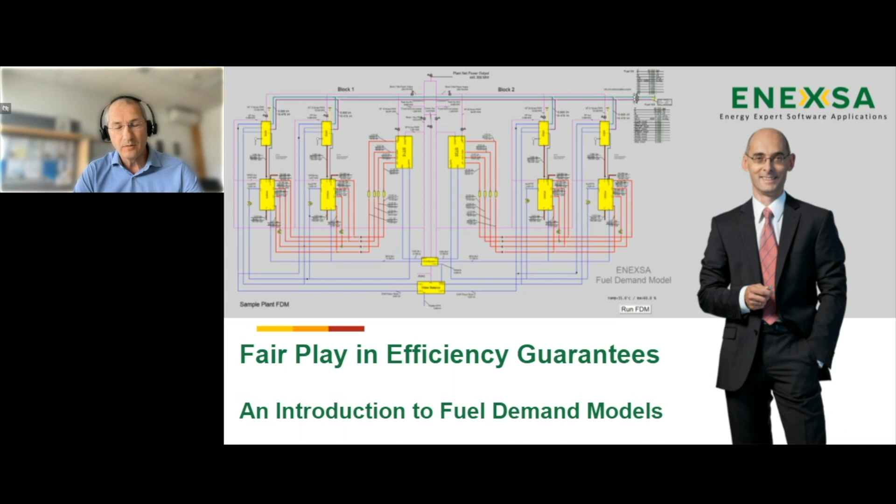My colleague Peter Hartner and myself want to give you an introduction to fuel demand models and settlement systems. First, I want to give you a brief introduction to our company, ENEXSA, and then go into our topic: introduction on why and how fuel demand models are applied. Then I want to hand over to my colleague Peter Hartner, giving you more technical detail on the thermodynamic modeling that we apply and on how a fuel demand model is running online. We want to conclude the webinar with a short summary of ENEXSA's experience, and most important of all, we want to answer questions that you may have.

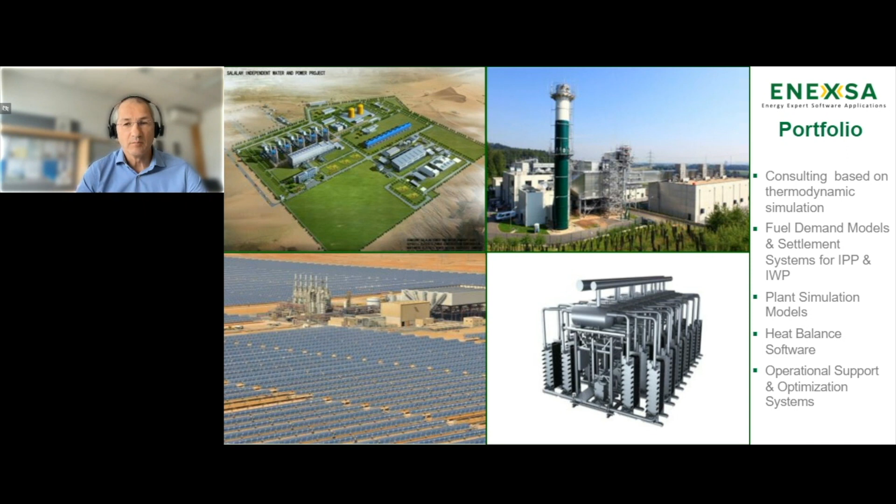But in most of our projects, the underlying part is a process simulation model, as shown on this slide. With the Ebsilon Professional Heat Balance software, we can model the power plant to the very detail. Peter will show more details later on in his part on the thermodynamic modeling.

Any type of power plant, may it be fossil-fired gas or steam plant, cogeneration plants, renewable plants like solar, or even the latest processes including wind, solar, PV, electrolyzers, fuel cells - all of that can be modeled to the very detail with this Ebsilon Professional Heat Balance software.

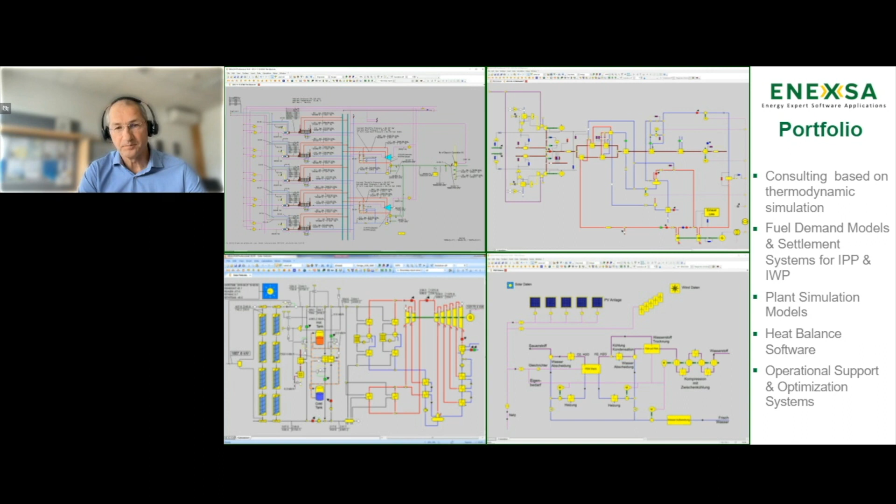This is our main portfolio: the supply of settlement systems, fuel demand models, and other plant performance models for independent power projects. The customers in this field include big names in this industry: ENGIE, Mitsubishi Corporation, Marubeni, Mitsui, Sumitomo, Sembcorp of Singapore, Mubadala, ACWA Power, TAQA. So all the big players we've been in contact with, we've been in projects with.

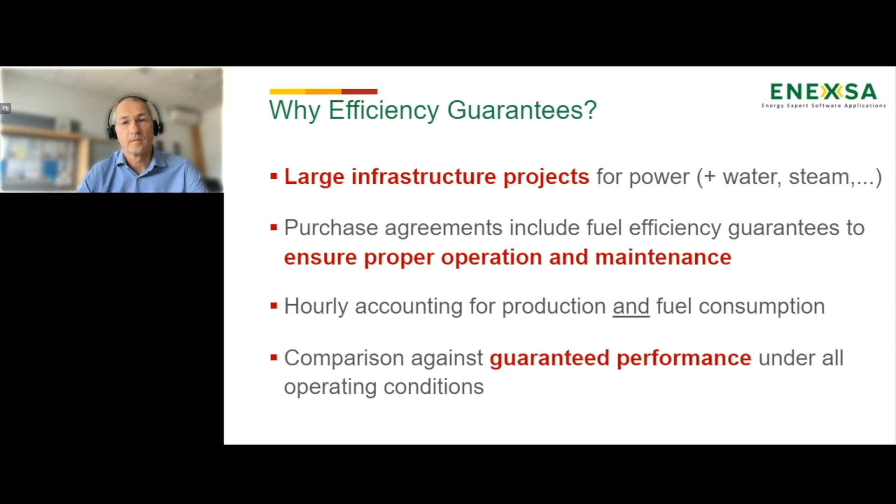The power purchase agreements as such include a single guarantee point, so-called reference site conditions performance. But there are natural factors on fuel efficiency that need to be considered. A gas turbine plant is very much influenced by ambient conditions - ambient temperature, pressure, humidity influence gas turbine performance.

The cooling water temperature on the condenser side influences the performance of the steam turbine. So ambient conditions are there by nature, and of course the operating company, the project company, must not be penalized if ambient conditions are changing. So there must be corrections for ambient conditions.

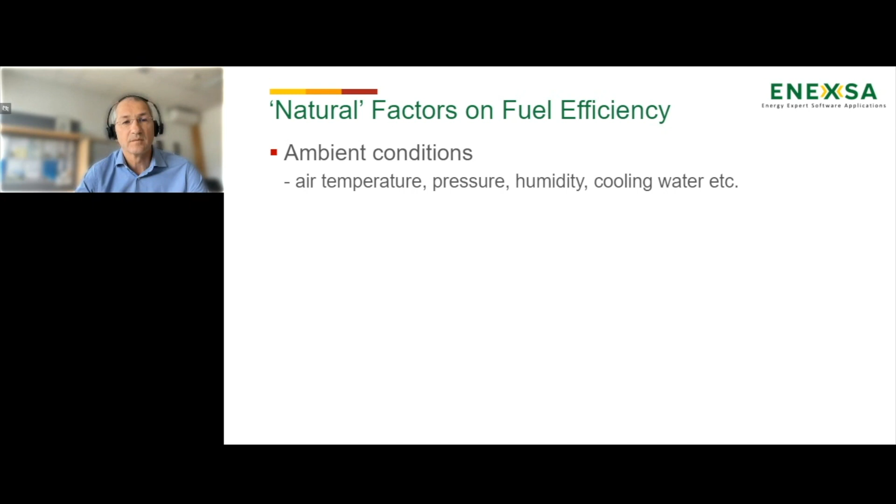Other factors from operation, like fuel type, fuel heating value, grid frequency, or the power factor - external factors that are not under the control of the plant - also influence the efficiency, and they must be corrected. Most importantly, the reference site conditions are typically at a baseload point with maximum output. Such operating modes are not the normal operation of the plant.

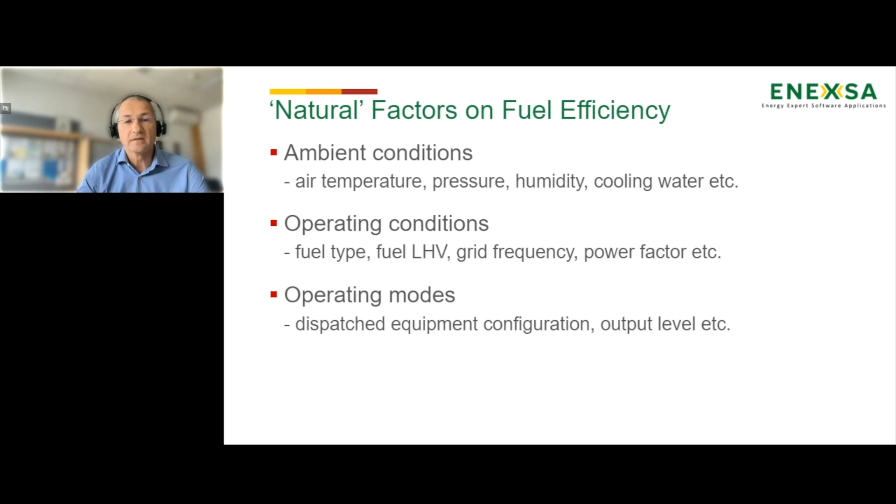Normally, plants are dispatched according to demand. They are kept at certain operating modes by the dispatcher, so the equipment configuration may change. The output level follows the dispatch instructions, so the plant is not operating under reference conditions, and thus the guarantee value must be corrected to reference conditions.

So the only output required from the fuel demand model in total is actually just one factor, the correction factor for specific heat rate. How is the reference site heat rate applied to the current hour according to the current operating conditions? This is the task of the fuel demand model, and that must be achieved.

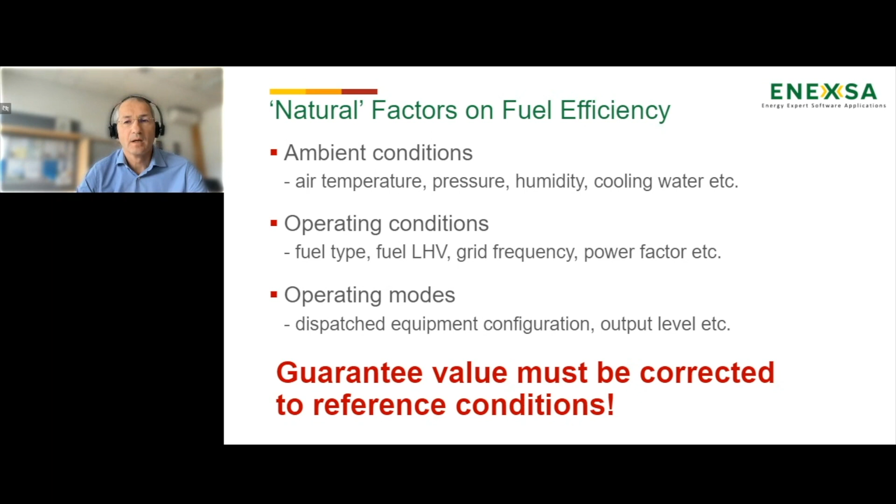How is that achieved? Well, there are different options in the correction methods. For a very simple plant, a table may be sufficient. The contract simply includes a table of how these ambient conditions or operating conditions influence the plant output and heat rate. There may be correction curves with the plant, so a little more complexity. If fuel efficiency is a result of several factors, it may be equations that fit.

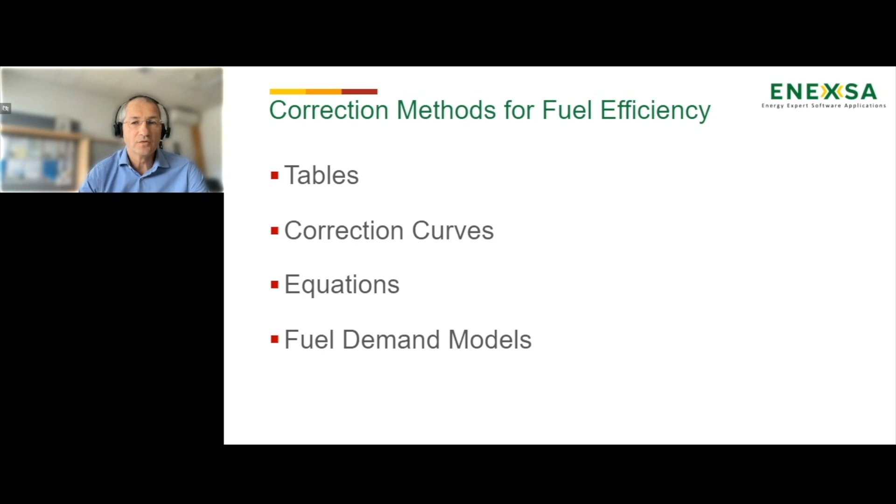But in fact, it turned out that for a full-scale power plant project with several generators and large equipment, fuel demand models are the proper approach. So let me introduce you to fuel demand models as such.

In general, they are process models. Still, they include some correction curves, and I'll take this as an example to explain how a correction curve works.

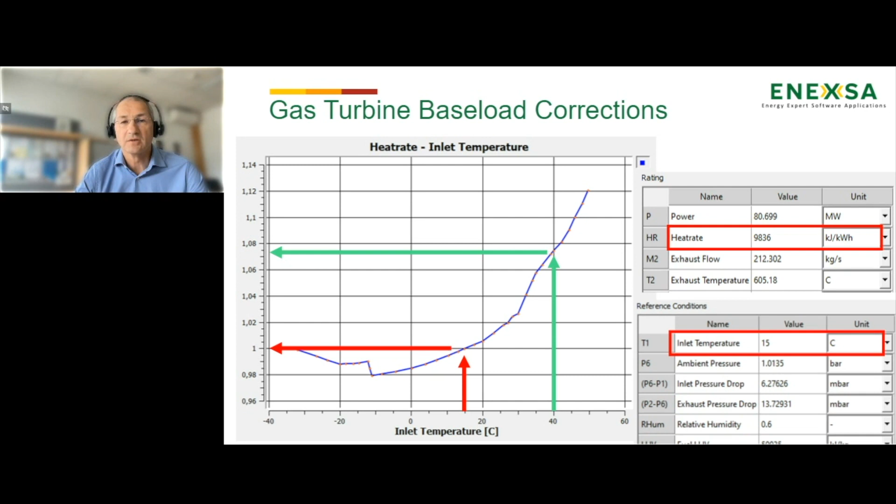There's, of course, many other factors that influence the gas turbine. Gas turbine baseload correction includes, as a minimum, as shown in this slide, inlet temperature, ambient pressure, inlet pressure drop, exit pressure drop, relative humidity, and grid frequency. Maybe even other parameters influencing performance, like water injection flows for power augmentation or NOx control, may also be added to this set of correction curves.

The key performance parameters of the gas turbine—power, heat rate, exhaust mass flow, and exhaust temperature—as shown on this slide, all have different dependencies on these parameters. So in this case, you have 4 times 6, already 24 correction curves for these parameters to adjust the output for a specific influencing factor.

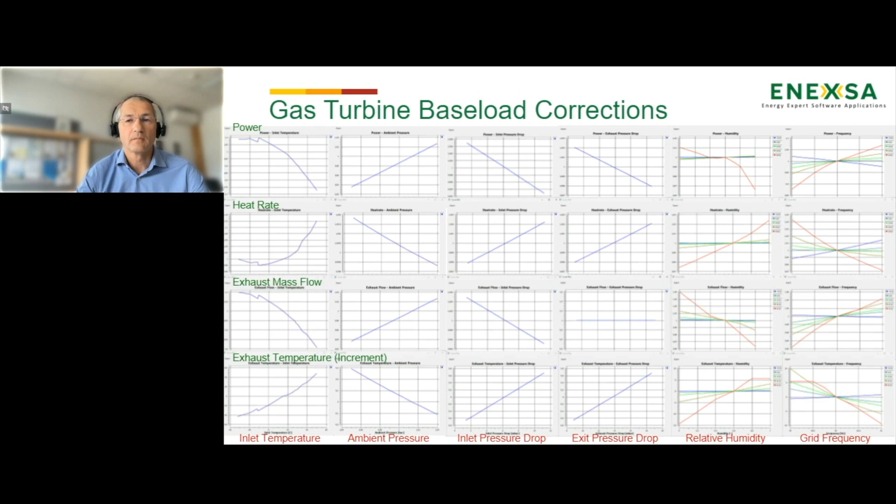In addition, if the gas turbine is not operating at base load, at full load, there are part load corrections. Typically, they include heat rate, exhaust flow, and exhaust temperature.

So if we look at the middle slide here, for this gas turbine, the exhaust flow—because of the operation of inlet guide vanes—is reducing with the load fraction up to a certain minimum value where the inlet guide vanes are closed to the maximum extent.

The effect of this change in inlet guide vanes can be seen on the right-hand graph, with the exhaust temperature. This is going up with part load fraction because of this throttling of the inlet flow to the gas turbine. So there's a lot of interdependence of parameters in the gas turbine, and all of these curves that I've shown so far just cover one gas turbine.

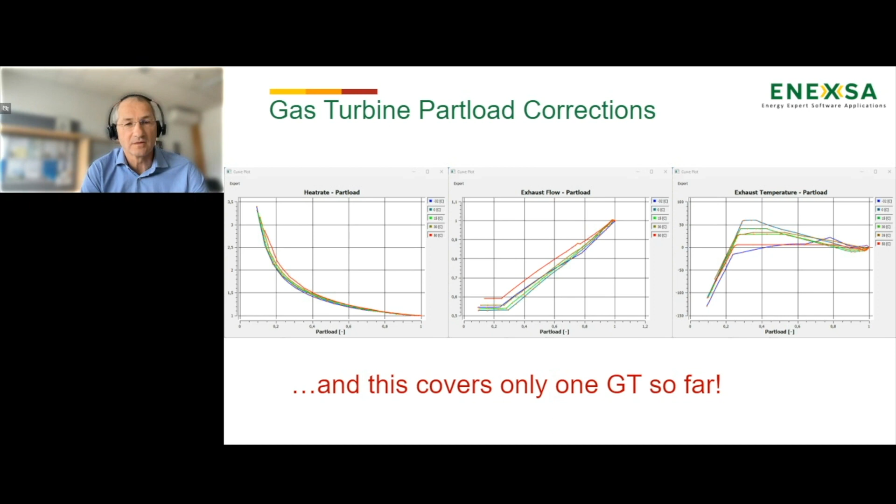So when looking at an overall plant, you can imagine that it would be a very long list of individual correction curves to be applied. Also, there's a lot of data that are not applicable, not available as a correction curve, but are a result of a heat balance calculation anyway, like steam production or other parameters that result from process conditions. So it becomes very complex to simply put that into correction curves only.

As an example of overall plant performance curves generated from a model, here you can see some performance test correction curves that are valid for baseload, because this is the way the performance test is performed, at maximum operating output.

The fuel consumption is determined and the respective corrections are applied, because test conditions typically do not exactly match reference conditions, so differences in ambient temperature, humidity, and pressure must be included in a correction procedure to determine values at reference conditions. Such plant corrections are only valid for a particular configuration of the plant, everything operating, any extractions or product flows at specified reference conditions.

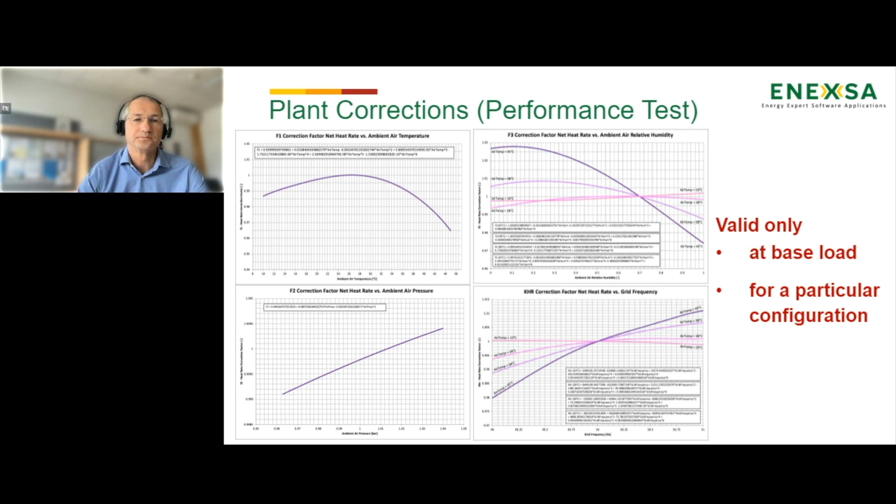Part load correction curves for a power plant are actually very specific, because as explained earlier, there are so many influencing parameters on performance. You can specify part load performance only at particular ambient conditions.

So the graph shown in this slide for a combined cycle plant in combined cycle and simple cycle operation, in terms of heat rate correction factor, is only valid for a fixed set of ambient conditions in terms of temperature, pressure, ambient humidity, grid frequency, and power factor.

Any of these ambient or operating conditions changing would change the shape of the curves. You can see that there is a factor of 1 only for full output in combined cycle mode - that's the end point, the most right point of the combined cycle operation with 2 gas turbines.

Then heat rate is increasing, and you can see there are 4 options: combined cycle with 1 gas turbine in addition, then 2 gas turbines, and 1 gas turbine in simple cycle. The values are relative - the factor in relative heat rate is relative to the heat rate at full load with 2 gas turbines in combined cycle mode.

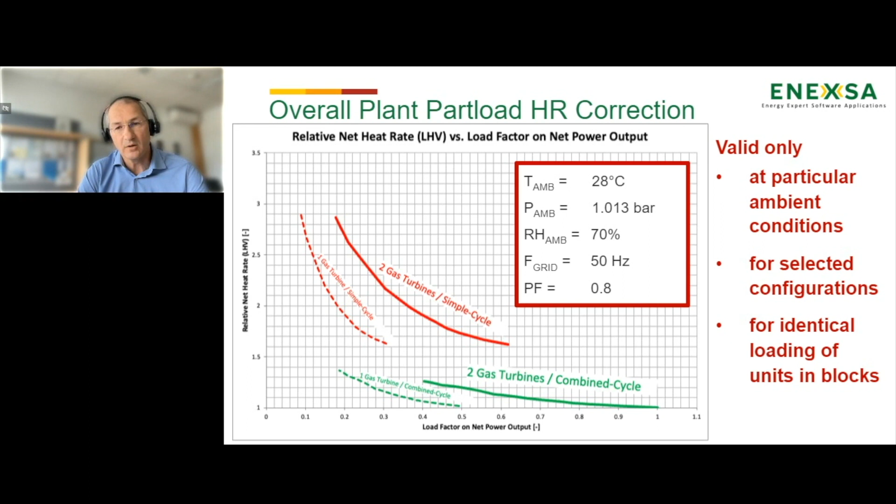So this type of curve is only valid at particular ambient conditions for selected configurations - in this case, one of these 4 curves, but also for identical loading of units in the blocks only. Would the plant operate one of the 2 gas turbines at a different load level, then the curve is not valid anymore. So it becomes quite complex to put that into a correction curve.

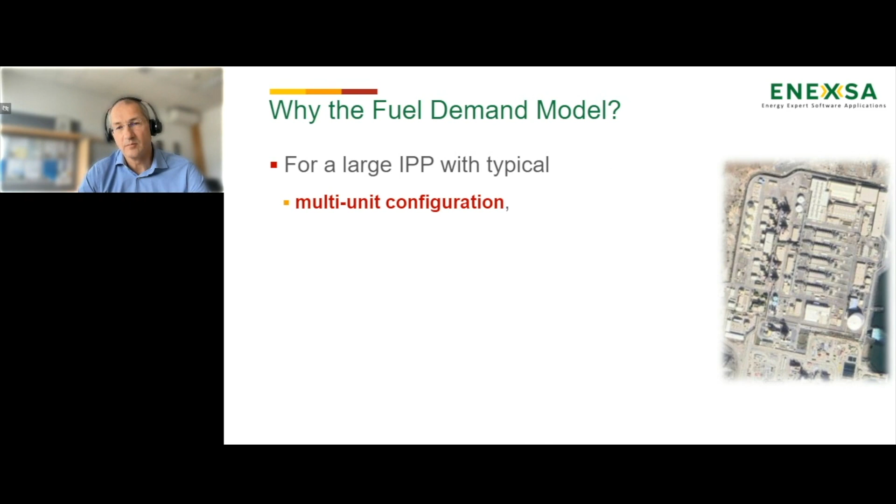So at the end, we come to a conclusion that for a large IPP with typically multi-unit configuration, operating options that are very wide - like additional duct burners, different modes of operating the cooling system, the application of inlet chillers, or desalination units that may be on or off in the equipment, and of course prevalent operation at part load, which is the typical way you operate a power plant to follow demand and dispatch - there are simply too many combinations to allow for a curve-based approach.

So this is why the fuel demand model was selected as the valid correction procedure for a power purchase agreement.

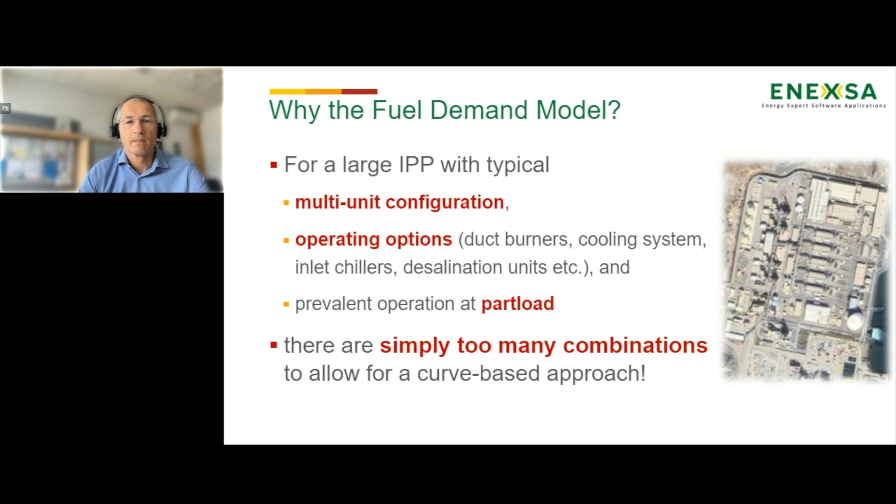And with that, I want to hand over to my colleague Peter Hartner to give you more details on the thermodynamic modeling with EBSILON Professional, which we apply in our fuel demand models.

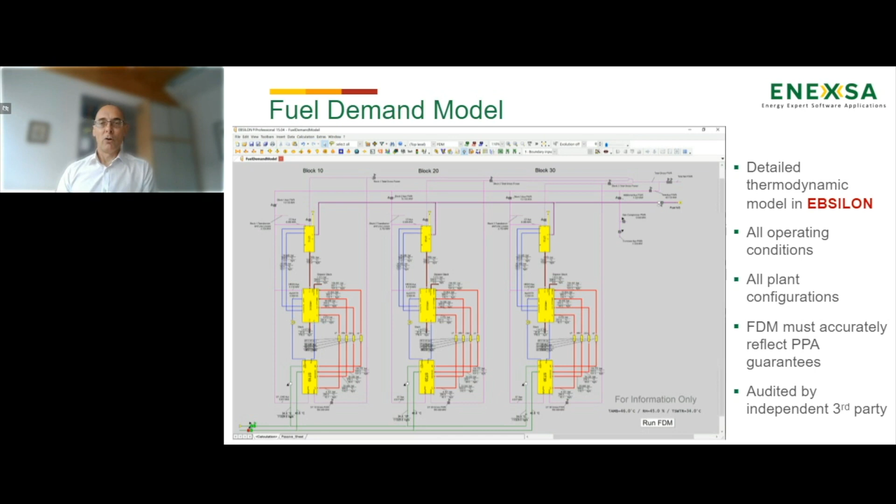So on the previous slide, you have just seen the top layer of such a model, but the model includes much more detail than what you could see from the top layer. Each individual unit is modeled to a great level of detail.

On this page, you can see the gas turbine, and it includes all the OEM correction information which Joseph has already presented in his part of this presentation. So each GT is being modeled separately, and it's covering the OEM performance, and it does also respect the PPA guarantees.

All units must be modeled independently. It's not sufficient to have one GT modeled and multiplied with a number of operating units, because each of the GTs could run at a different load level. It could even use different fuels, or the air inlet conditioning could be different for the different units for whatever reason.

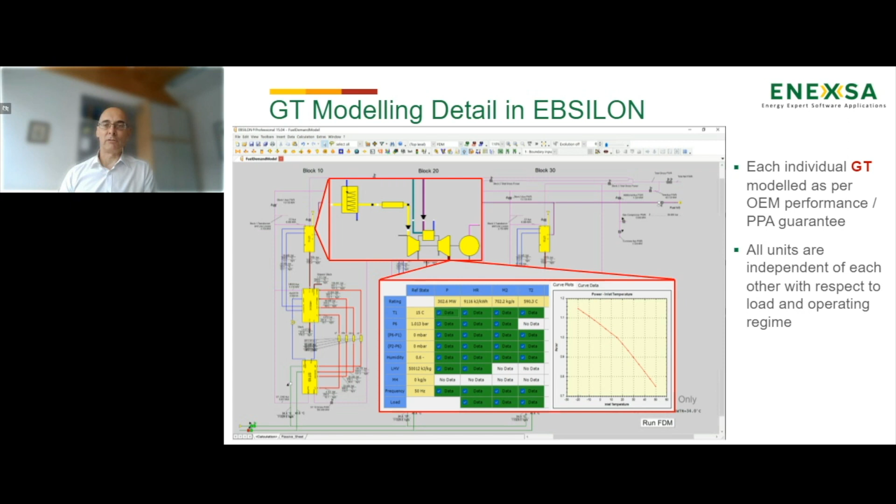In the same way as the gas turbine, ENEXSA also models the HRSG to a great level of detail. Each heat exchanger surface is modeled separately. Duct burners are modeled separately. The steam temperature control is modeled as per the design philosophy coming from the EPC, and so on. Considering all those different heat exchanger surfaces and the proper configuration allows the model to behave in the very same way as the physical plant.

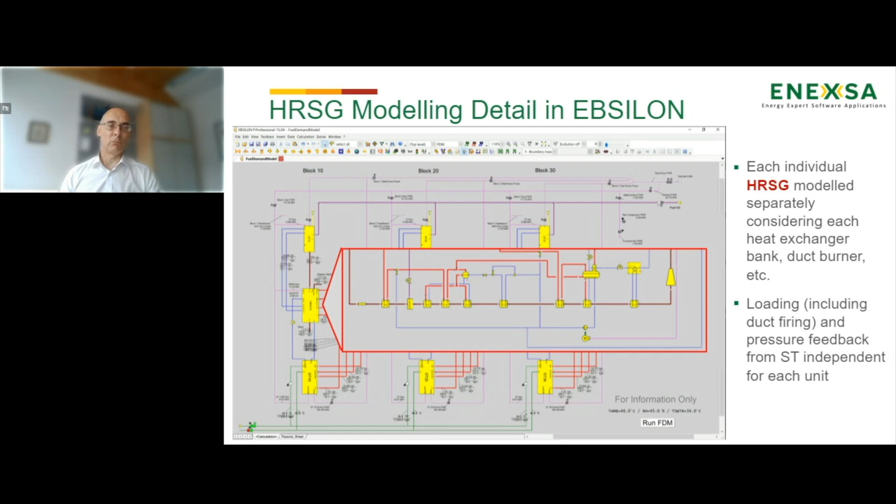So loading of individual steam turbines with different pressure feedback to the HRSGs, etc., can be covered. Again, it is important to have every unit of the plant being modeled separately. It's not sufficient to just model one train and then multiply by the number of units in service.

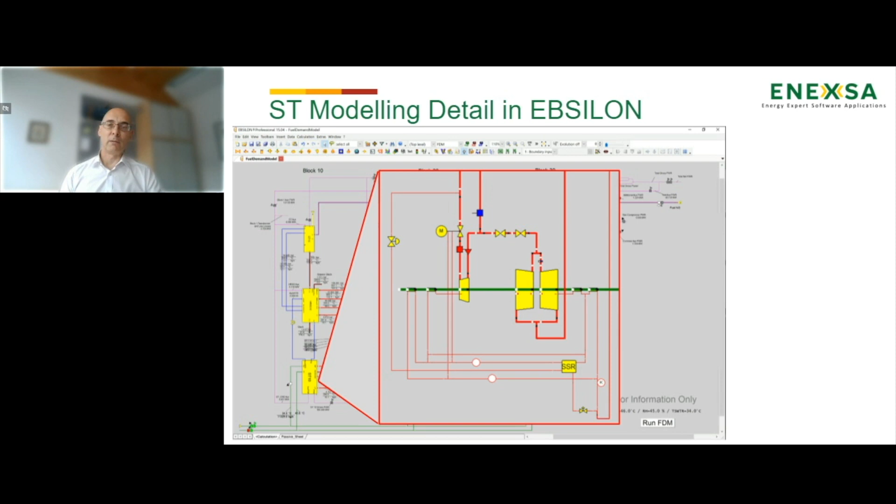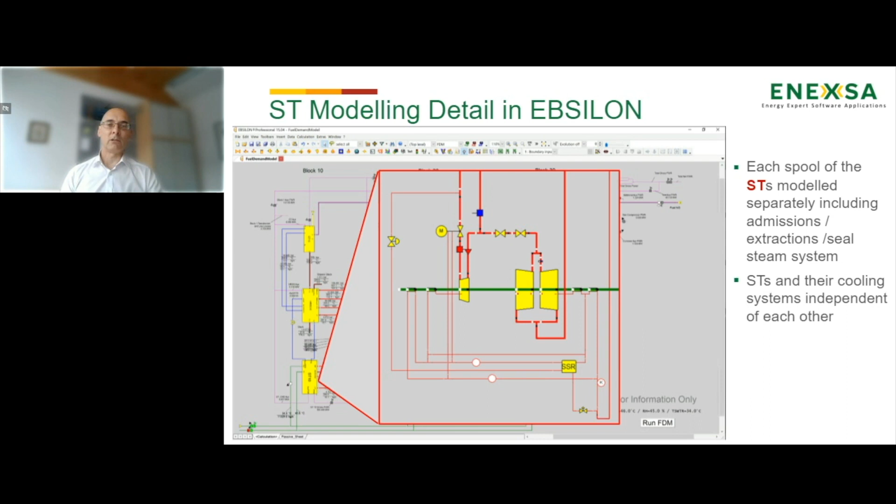Steam turbines are modeled so that every spool of the steam turbine is represented separately in the model. This allows accounting for any admissions or extractions for product steam or for steam returning from a customer, and also the cooling systems for the steam turbines are modeled separately, so that basically the whole model behaves in the same way as the physical plant.

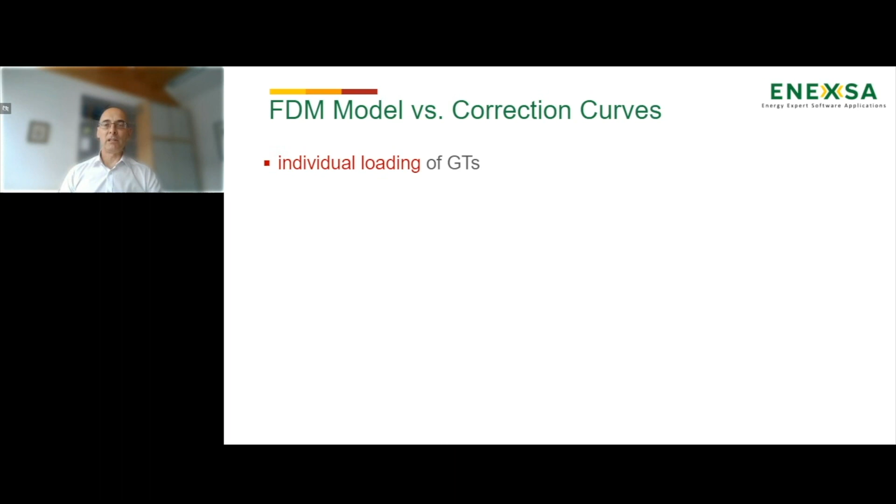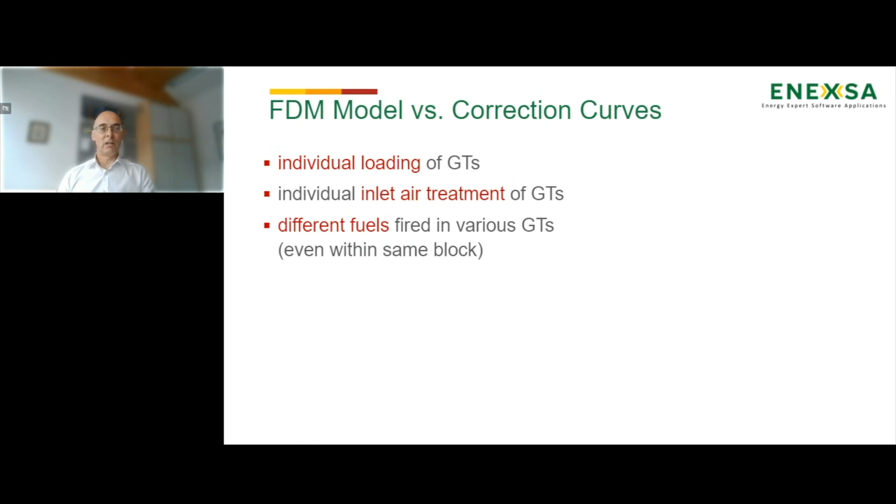So when talking about FDM model versus correction curves, one needs to consider the following: in a plant, the GTs may be loaded individually, the inlet air treatment of the GTs may be operated differently for different GTs, different fuels might be used for different GTs even within the same block, and simple cycle and combined cycle operation may be combined at the same time.

Different loading and inlet pressure control for steam turbines has already been mentioned, and also admission and extraction from steam turbines. All these aspects are manageable with one single heat and mass balance model, or alternatively with an almost infinite number of correction curves. So it's a much easier task to cover all the different ambient, loading conditions and configurations with a single model, because the model basically behaves in the same way as the plant.

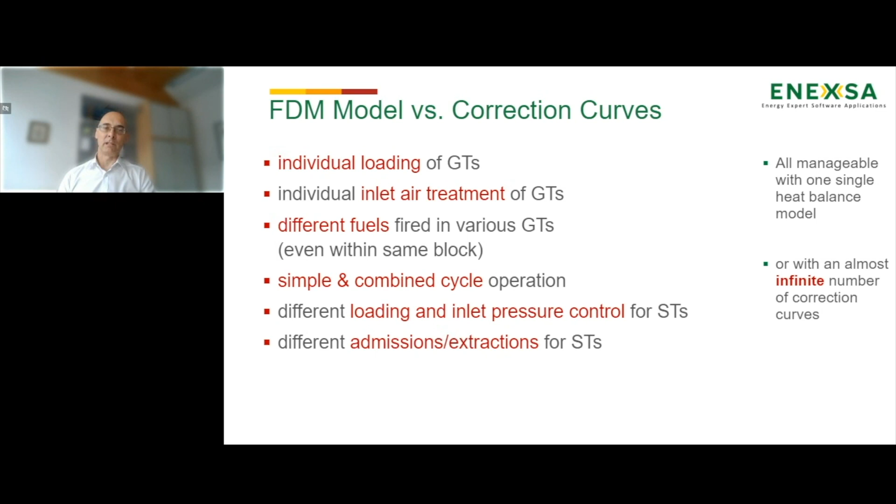So it's basically a twin of the plant, an electronic twin, whereas for the correction curves, you require so many curves that it's impossible to do this correction task within due time. You also need to consider that for creating those correction curves, you need a heat balance model anyway. So why not use the model in the first place rather than coming up with a huge number of correction curves with a very complex process to get the correction factor, instead of just running one model and having the correction available right away.

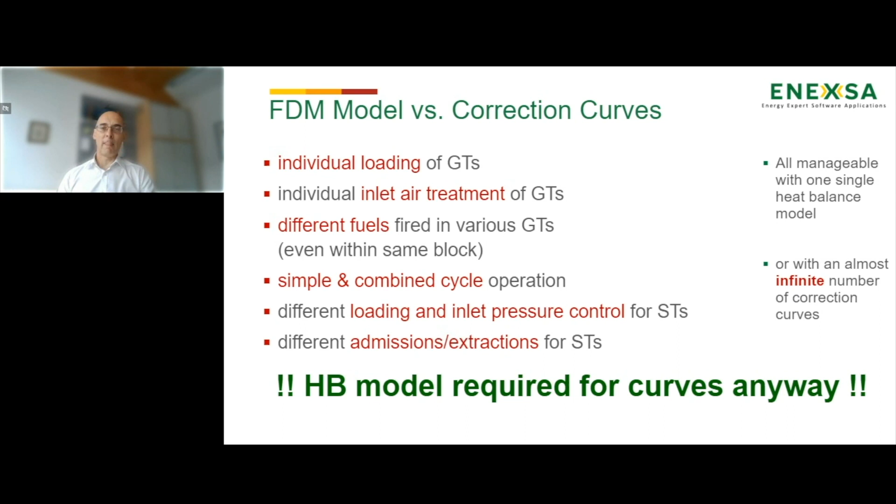So there are certain requirements, required information, so that one can build a fuel demand model. Of course, you need the OEM performance or correction information, so that the performance description, the operational performance of the unit can be properly represented in the model. This is true for the gas turbine, HRSG, steam turbine cooling system, and also for the major balance of plant equipment.

The design and off-design plant heat balance diagrams are required. This allows identifying any control strategies which need to be implemented so that the fuel demand model behaves in the very same way as the physical plant.

And finally, you need to know the fuels and the impact of the fuels on the equipment, especially for the gas turbine. Compositions and heating values and the limits for those different types of fuel are required.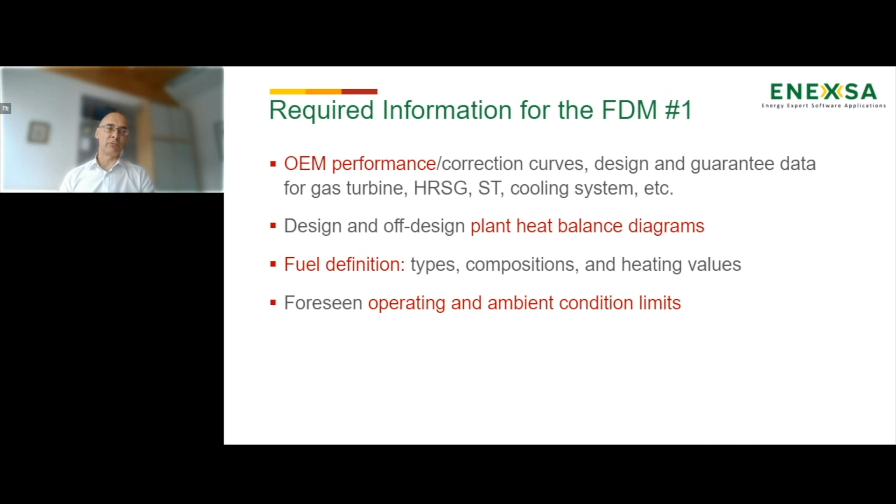You need to know the foreseen operating and ambient condition limits so that the model can be configured properly. Finally, you need to agree on, or know, the agreed auxiliary load model, because the model should calculate the guaranteed or projected fuel demand for a given operating scenario. The auxiliary load model is also one of the important things to be factored into the FDM, so that there is no over- or under-compensation of fuel when it comes to misconfiguration of the auxiliary equipment at the plant.

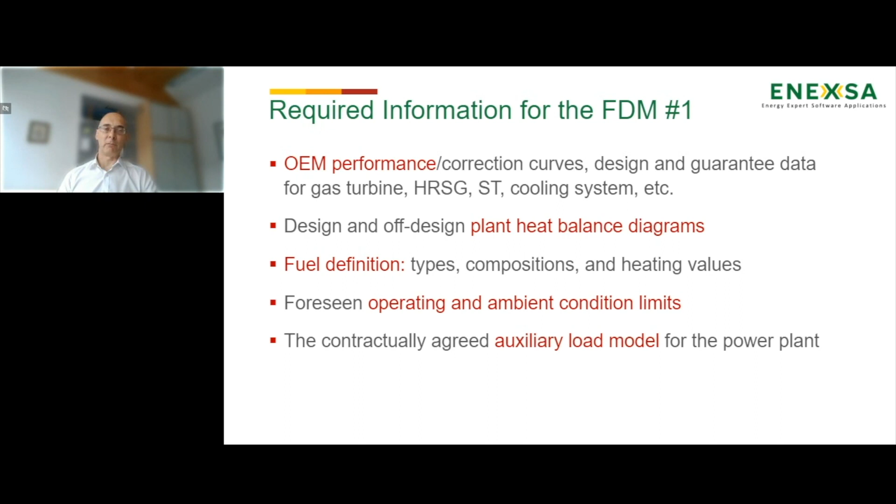Furthermore, you need to know the operational limits, so maximum duct fuel energy consumption or maximum gas or steam temperatures, so that one can set up the proper control strategy in the model, so that duct fuel, bypass flows, letdown flows, etc., are not exceeding a limit, so that the fuel demand model will not give an infeasible result, or it will not simulate a case which cannot be accomplished or where the plant cannot be operated.

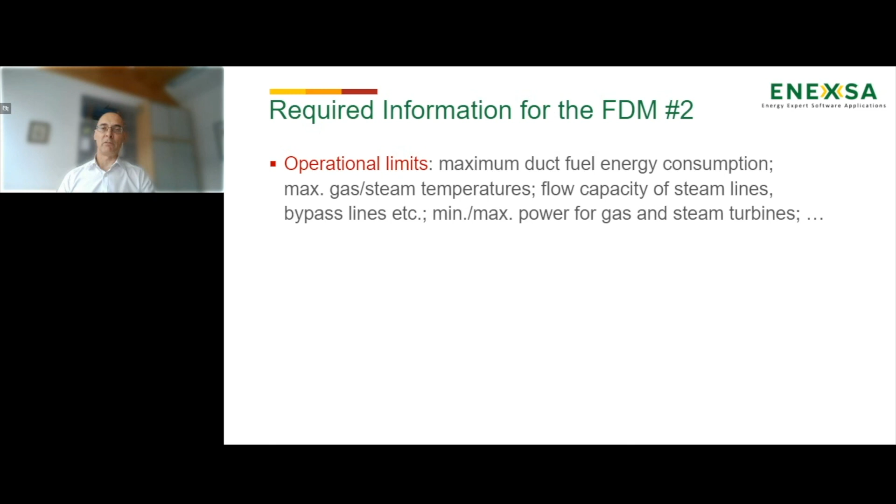The plant guarantee values are important, as Joseph already mentioned, because at the reference site conditions and also at a few operating points which are pre-agreed in the contract, the model must respect the guarantee numbers which have been specified in the PPA or EPC.

The anticipated modes of operation and the associated control philosophy is important, as mentioned, so that the model does behave as a digital twin of the plant as close as possible.

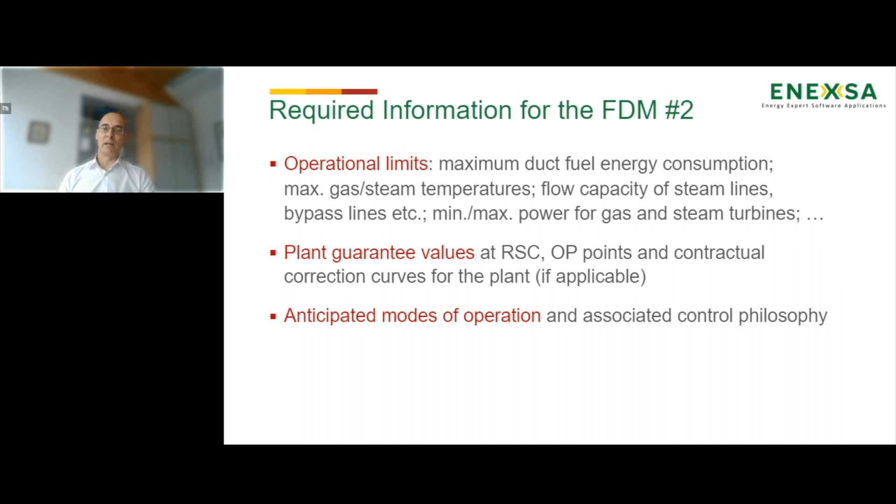Now, as Joseph mentioned earlier already, the most important task or the most important criterion for the FDM is that it must match the contractual guarantees. So, on the one hand, the model should match the OEM performance as close as possible. So the plant or the model should behave in the very same way as the plant, and it should show the very same physical behavior of the plant. But most of all, it must match the contractual guarantees, or it must not exceed the contractual guarantees.

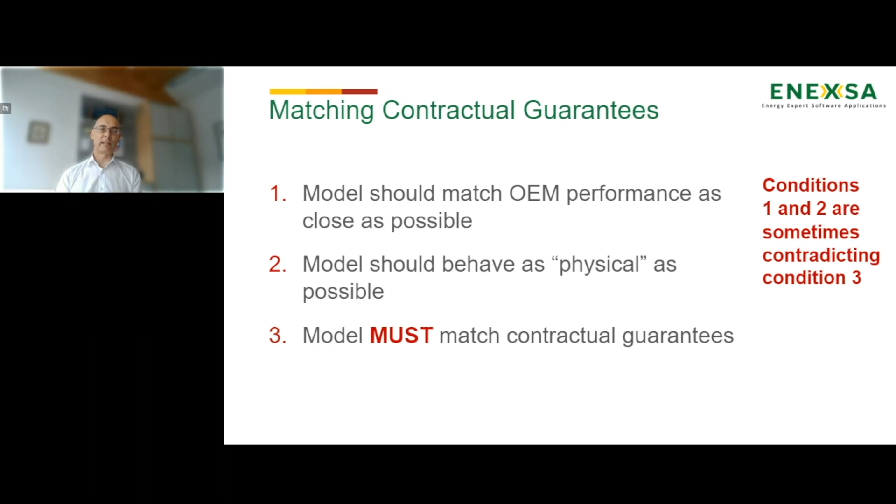Now, as we all know, in order to be successful in a tender, sometimes there are commercial decisions being made, and offered numbers or guaranteed numbers are somewhat aggressive, and sometimes the conditions 1 and 2 on the slide are contradicting this condition 3. So the only thing one can do in this case is to bridge the gap as much as possible with a flexible model, but in no case can the model exceed the contractual guarantees.

So, condition number 1 must be that you match the contractual guarantees, and then the model should match the OEM performance as close as possible with the same physical behavior as the plant, while respecting the contractual guarantees. So this is the paramount condition for a fuel demand model.

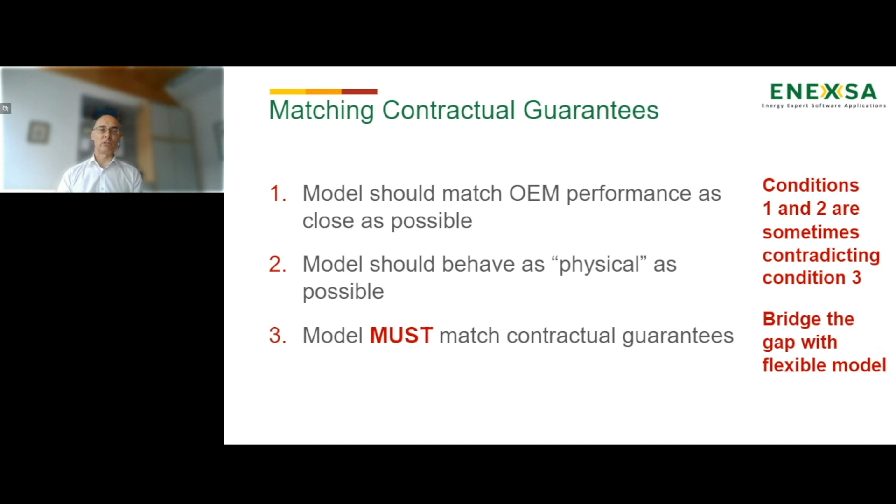I've already mentioned that an independent auditor, an independent third-party consultant, should be assessing the FDM to get reconfirmation that the FDM is in compliance with the PPA. It provides a double verification of the model by a neutral party who has no interest in shifting performance in either direction. It does also allow confirmation of the correct online implementation to satisfy lenders and financial auditors, to assure that the model, which has theoretically been tested against the OEM curves, is also properly implemented to be fit for operation throughout the term of the contract.

Now with that, let's come to online fuel efficiency calculation and what is to be considered when doing this. There are a few challenges in online mode.

So when you run a model in offline mode, the operator of the model has certain means of intervention, but for online operation, the model must converge reliably under all possible conditions. Also, the recalculation of a large number of cases after correction of input data or after an outage of the hardware must be possible within a reasonable time frame.

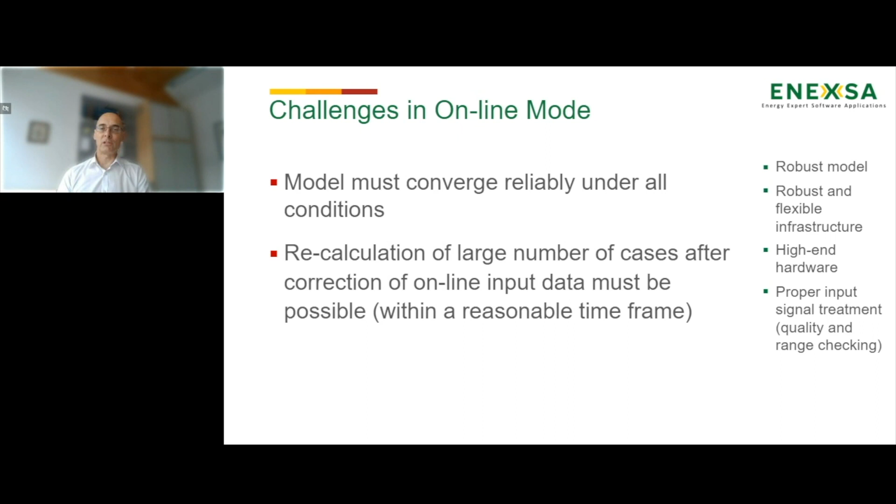And you, of course, also need proper input signal treatment, so quality and range checking. Do not even start FDM cases with invalid or inconsistent input data, because that would not lead to a valid result anyway. So, to save resources, proper data management is also of essence.

So how are we ensuring reasonable results?

One thing very important is input data range checking. It is of essence that the parties work together closely in order to define the range limits for the various parameters which are input to the FDM.

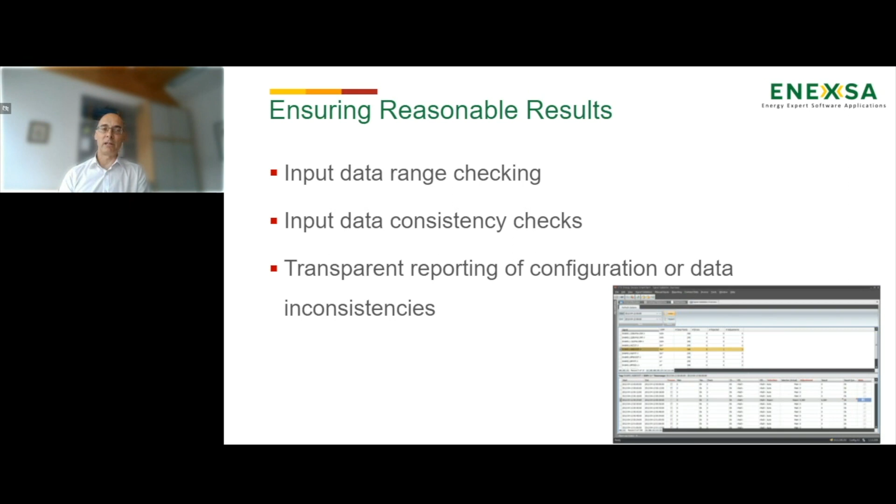When it comes to modeling, input data consistency checks must be applied to ensure that the model does have a chance to converge. And of course, transparent reporting of configuration or data inconsistencies must be included in such a model. So this goes far beyond the thermodynamic modeling - it's really relevant for the whole infrastructure and for the whole settlement system and fuel demand model.

Finally, if you cannot find a solution, you must have replacement strategies in place for invalid FDM results, so that you still can do the hourly calculations, the hourly accounting for fuel, even though the input data did not allow for a calculation of a valid FDM result.

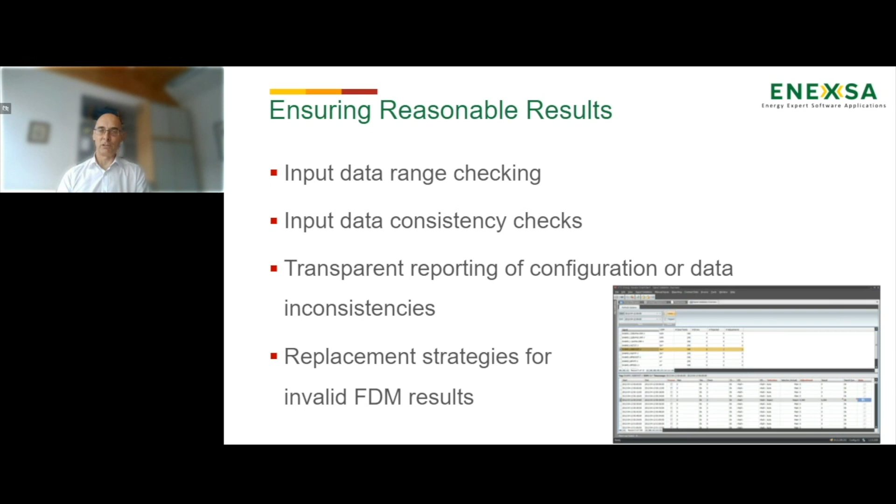There are certain key qualities which such a fuel demand model must fulfill. The one is detail - the FDM must be able to match all the possible configurations. Accuracy - you must have undisputed results, so you must be able to tune the model to match the OEM performance data and correction curves and OP points as close as possible.

Reliability is very important - the FDM must produce reasonable results whenever possible based on the input data available to the system. And it must be very easy to use, so you require online infrastructure and offline infrastructure so that you are very flexible when it comes to troubleshoot any of the input data and provide a valid FDM result for most of the FDM cases.

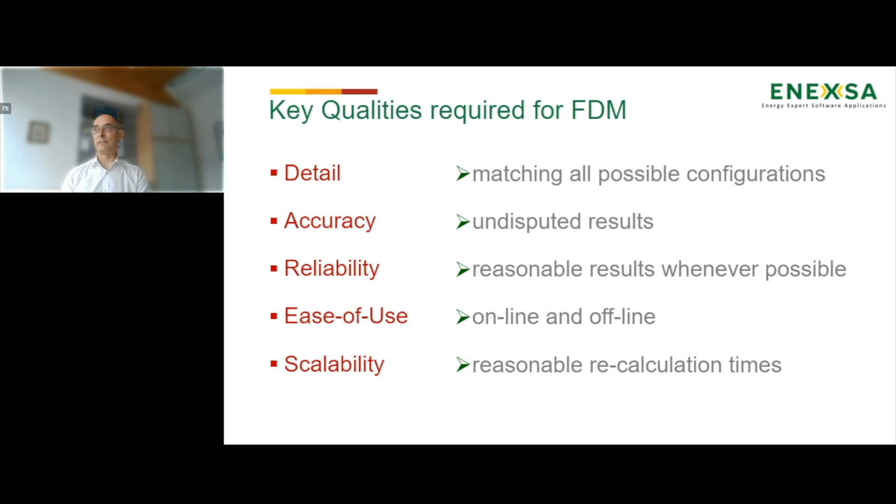And it requires scalability - the system must be designed in such a way that it allows reasonable recalculation times. So in case of a data outage or hardware outage, after some time, you need to recalculate the FDM cases for the month in a reasonable time, so that your invoice calculation or invoice creation at the end of the month is not disturbed or delayed.

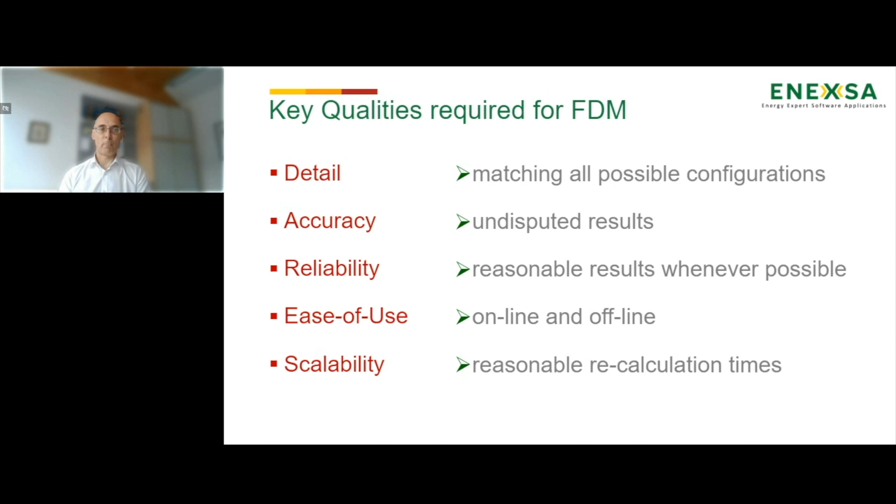With this, I'm handing over to Joseph again and let him talk about ENEXSA's experience.

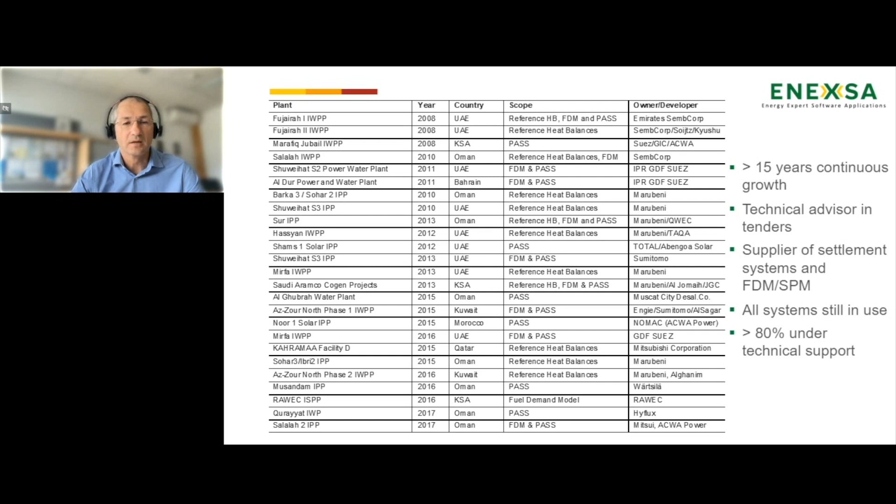As you can see, it spread our projects as well as the IPP market into other regions. We have many references in Saudi Arabia, solar plants in Morocco, but also a lot of fuel demand models for cogeneration plants recently, and I expect that to be one of the most frequent applications in the future.

As many companies also consider cogeneration facilities under an IPP project. And of course, if we sum up our experience over the last 15 years, we end up with more than 30 gigawatts of installed capacity that are equipped with our settlement systems and fuel demand models.

Total water capacity larger than 8 million cubic meters per day. So we have quite a large fraction of the market covered with our system.

As we also see, we are a real company, not a small company working with freelancers. It is a company with a full service team, and we've been asked for replacement of existing systems by vendors who have disappeared from the market or are not able to maintain the systems over the 20-25 years of a contract. So we have started to replace a few systems recently during the past 2-3 years, and we see continuous requests coming in for this matter as the IPP market has grown older and first contracts are being extended.

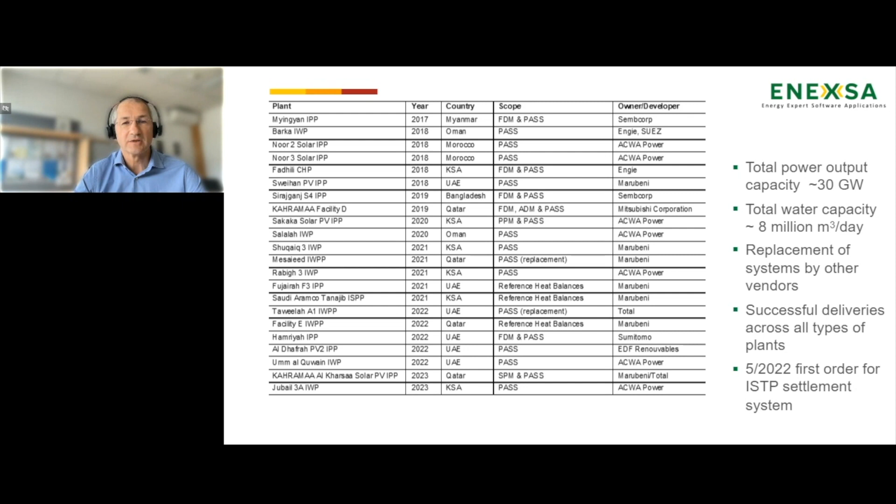With that, I want to conclude the summary of our references, a long list—you may see familiar names. Feel free to ask questions if you have any to a specific project. But with that, I want to end this summary.